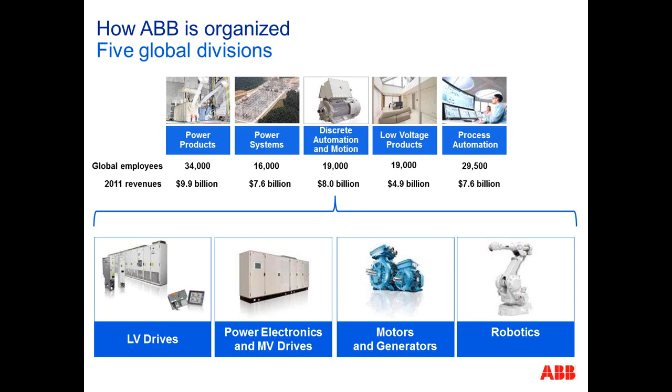ABB is divided into 5 global divisions, and robotics belongs to the Discrete Automation and Motion division. As far as the robotic paint business is going, we are located in many countries, as you can see on this map. We have operations in most areas with industries.

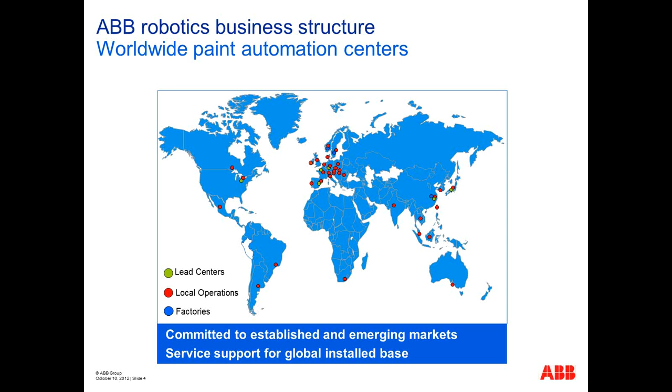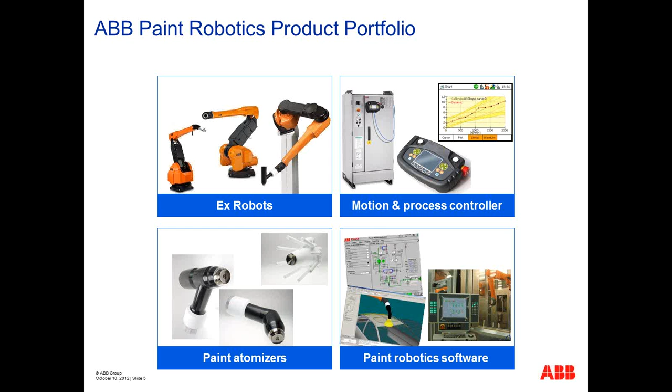ABB is producing a complete portfolio of paint-related products. We have explosion-proof robots, we have motion and process controllers, we have our own paint atomizers, and we have all the software that we need to control efficiently a paint system. We also have very efficient offline programming tools. We put all those products together to make a complete robotic paint system.

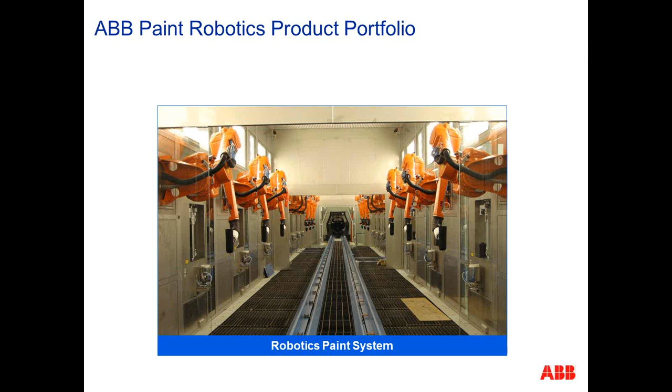So you see here on the screen an example of what it looks like when we put it together. What I'm going to talk about is our latest development in exterior car body painting, what we call the 3rd generation of robotics. And I'm going to clarify that.

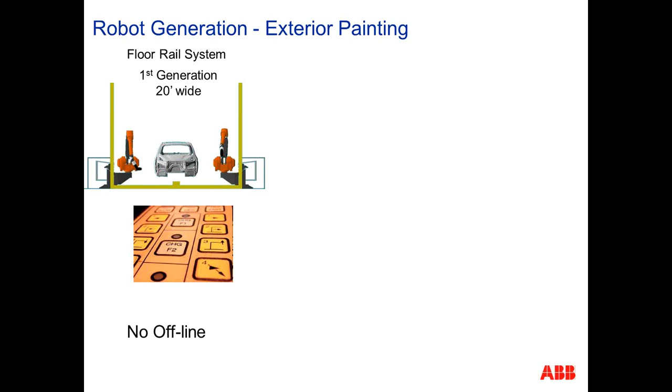The 1st generation, we had a robot mounted on rails, and they were kind of at floor level. With this, the spray booth was 20 feet wide, which is about 6 meters wide. We had programming done with a teach pendant with buttons that we were pushing. Not easy to program. Absolutely no offline programming tools.

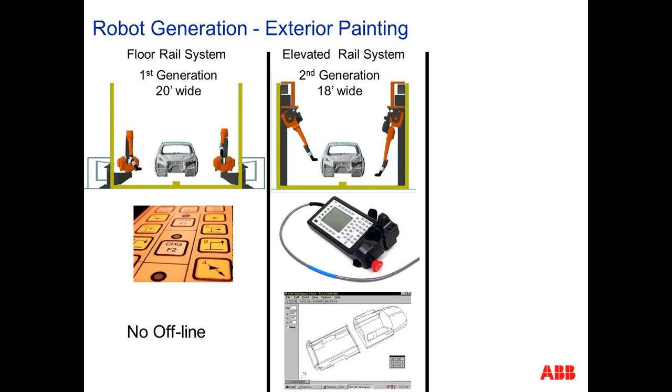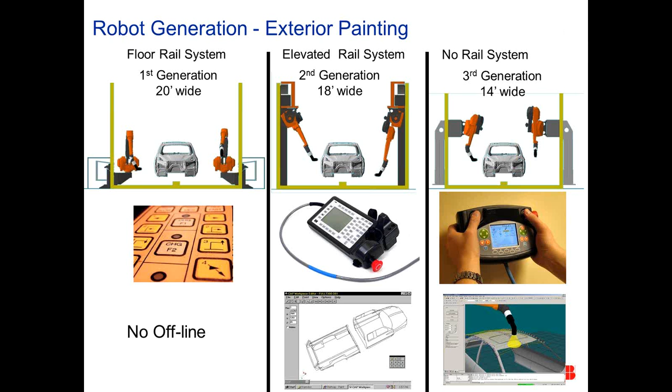The third generation is a little bit different. We have robots mounted on the wall of the spray booth. They are not moving with rails, they are stationary. We now have to program with a very sophisticated and nice teach pendant with bright color screens. Actually, it's almost like a video game station that you've got in your hands when you're programming that. And we have offline programming tools that are very powerful, letting us create all programs before we start programming anything with the robot itself.

So what's so special about this generation of robot, and how can a robot work in a narrower booth? So I'm going to play, it was supposed to be videos, but on a webinar that does not work very well. So I have little animations here that are going to explain how this robot has a unique kinematic that lets it work in a very small booth with bigger arms. So it's a little bit of a contradiction. We increased the size of the robot, bigger and longer arm, and now it's able to work in a very narrow booth.

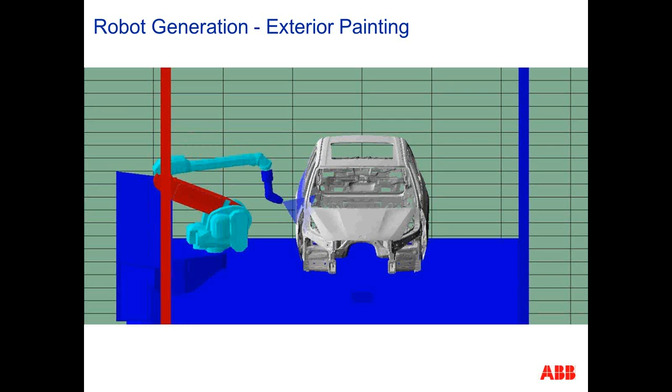In this animation you can see how the robot moves, and when it moves along the car, the back of the robot, this classic kinematic, is touching the back of the wall. So it doesn't matter where you put the robot, either on an elevated rail or mounted on a lower level, when it gets to that point, either you need a bigger spray booth, or you need the robot on a rail driving it up and down so you never have to go through this position.

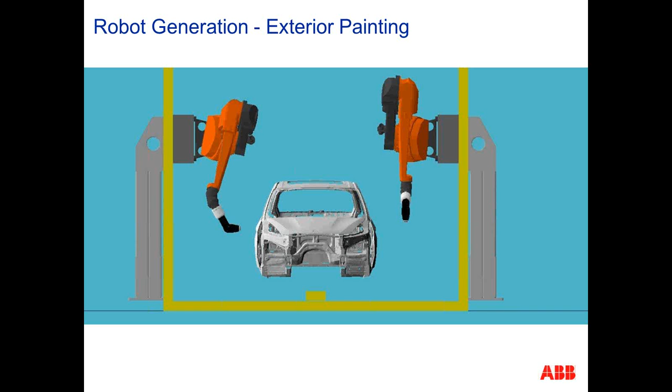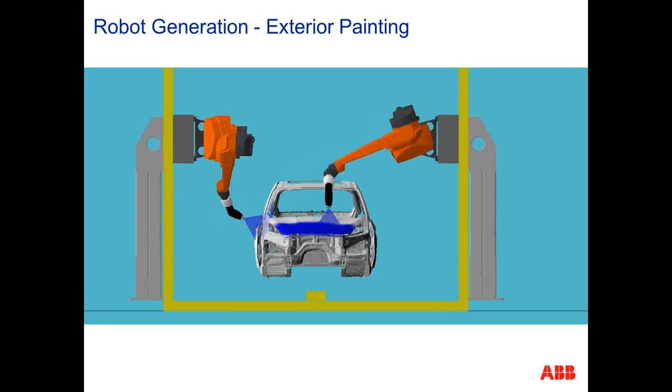Now let me show you how that works with the new kinematic of a robot. Robots are mounted in a different position and the kinematic is different. The robot on the left side is going to paint the side of a car, and the robot on the right side is going to paint a hood and roof, horizontal surfaces. The robot is working parallel to the booth wall, it never tries to go into the wall, it's just working like that. Same thing for the robot painting the hood, the elbow of the robot never tries to go through the spray booth filter. That's what makes the big difference for this robot, the kinematics: longer arm, working in a very small spray booth.

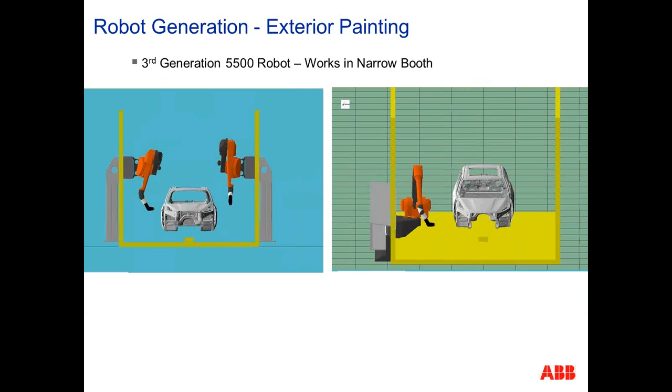If we look at this robot, it has many features, but we're going to focus on the interesting ones, those that impact your spray booth size and your production throughput. We're going to talk about high acceleration, large work envelope, and working without a 7th axis. What are those really doing when it comes down to designing a spray booth or a spray system?

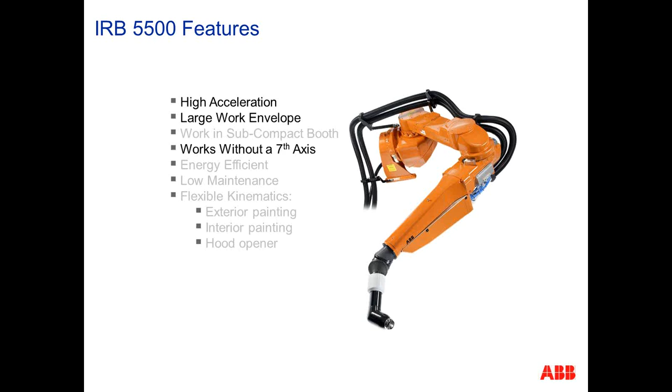The way we program the robots, there are 3 different ways to program robots at ABB. We have the classic programming method. On this screen you can see this little blue box surface, this is what I'm trying to paint. In this view you can see the robot motion. I have a little tracer that will show you where the robot has to move the atomizer, and the atomizer turns on and off every time it's changing direction. That's the classic way to program robots.

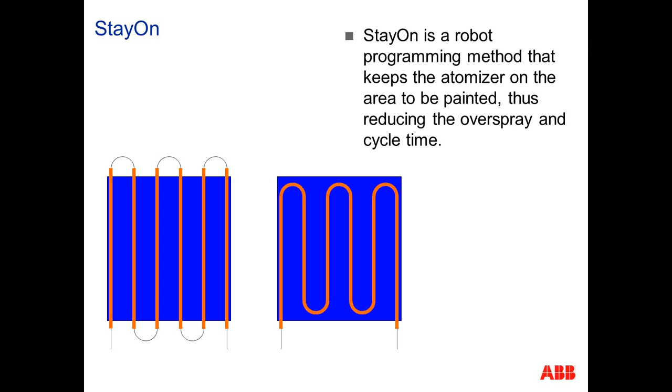We have developed another way where the robot stays on the part and the trigger stays on, so we call it stay-on. With this, it's quick to understand that you get a shorter cycle time because you travel less distance. You're reducing the overspray and you're reducing the paint consumption.

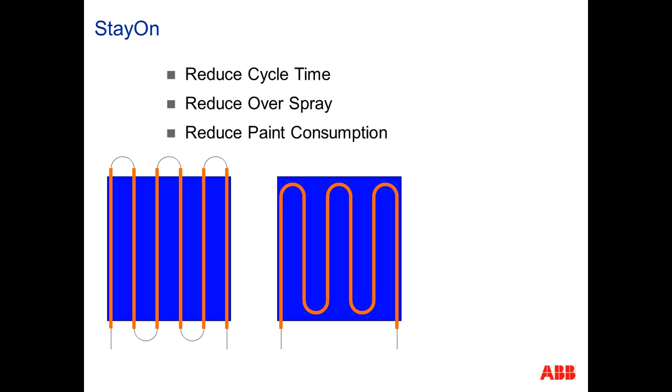I had this question many times, everybody's asking me, well, why didn't we do that before? What's so new? Why don't we just do that all the time? The answer is very simple.

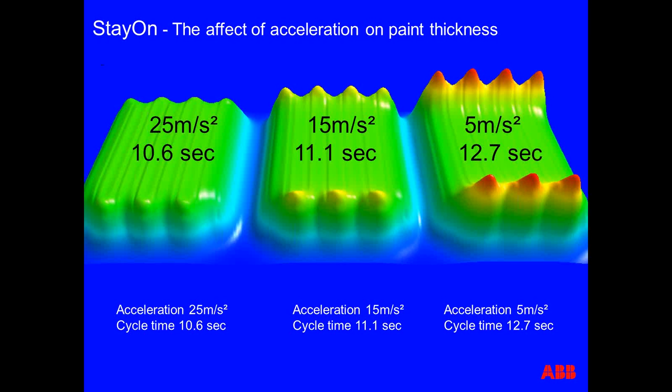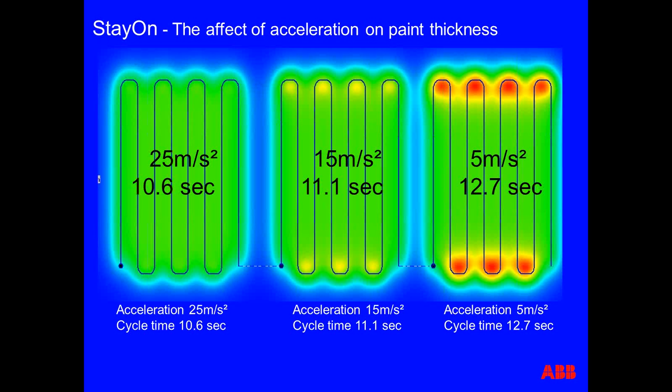The second impact of high acceleration is the cycle time. If you look at this slide, it's very easy to understand that to achieve the exact same distance, if you have acceleration available, you're going to travel faster. So we can see here on a simple program that could be a hood or half a roof on a car, already 2 seconds of cycle time difference, just from the acceleration.

Do we need a 7th axis on a robot like that? Let me show you a little cross-section here, and you're going to understand where I'm getting with this.

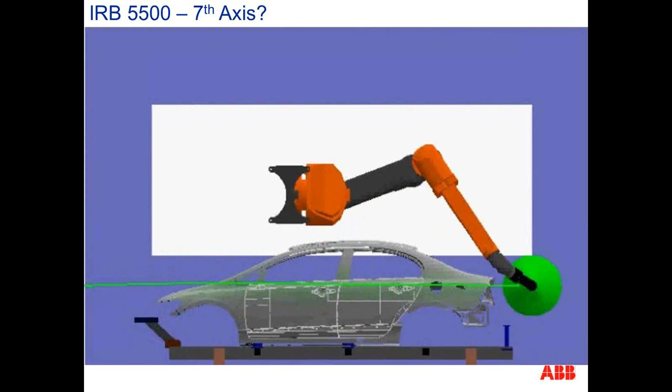This robot is not moving. I put a car here that's around 4 meters in length, just to give you an idea of the scale of what this robot is able to do.

So this robot, from a stationary position, is able to paint on the side of a car strokes of 6 meters long. We don't have that many cars that are 6 meters long right now, but when the car's moving, that's enough to let us paint the side of the car.

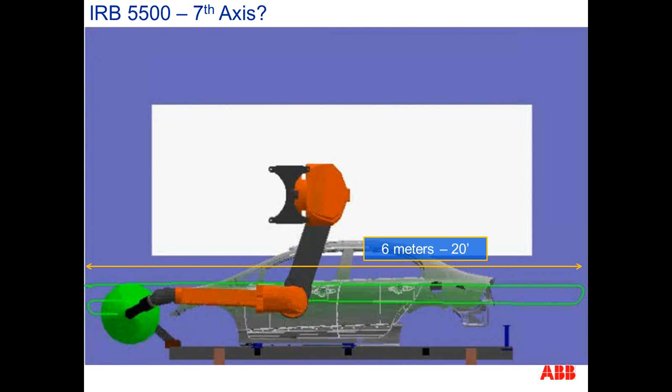This is what really makes a big difference in the way we program. I'm going to explain how we use this large work envelope to improve cycle time and paint quality.

Let's say I have to paint the hood of this car here, and a classic way to spray it is you split it among the left and the right robot. So right now I can see a robot on the left side of the car spraying half the hood, and I have a robot on the right side spraying the other half. Now what I have to do with those two programs, left and right, I have to do some stitching to join them in the middle.

Usually this area is where we have trouble with quality. Either we have too much paint, not enough paint, not distributed correctly. And it's visible right on the front of the hood.

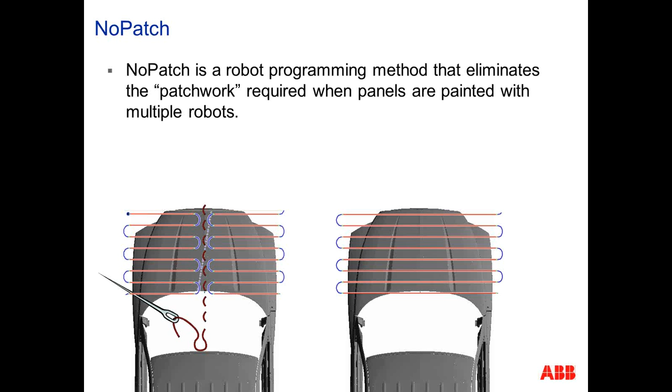Another way to do it would be to just paint completely left to right, like that. Complete the entire panel, no interruption in the middle, no junction, no stitching. To do this, you understand you need a large work envelope.

So not only do you get a better quality, but here also, here's the impact on cycle time. If you do 2 programs versus 1 program, using the exact same application parameters, same speed, same acceleration, there's a 4 second cycle time difference just on 1 panel on the car. So you understand here the impact on the cycle time.

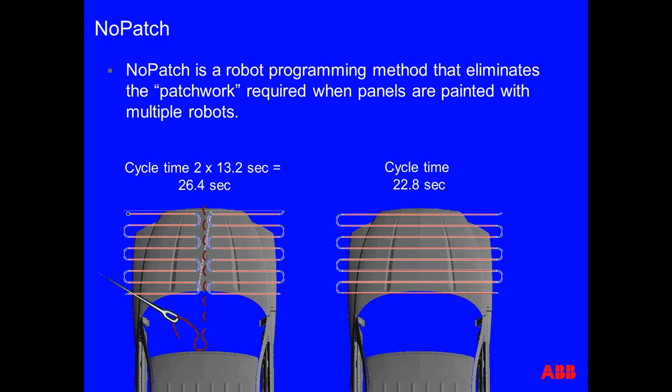Now let's talk about quality on the car. As you are making the stitching on this panel here, you're going to have little bumps and little valleys. On this model, this is kind of the best you can get, really close to the best you can get. So you can see that not stitching the programs, or not patching with multiple little programs, makes a more smooth and evenly distributed layer of paint.

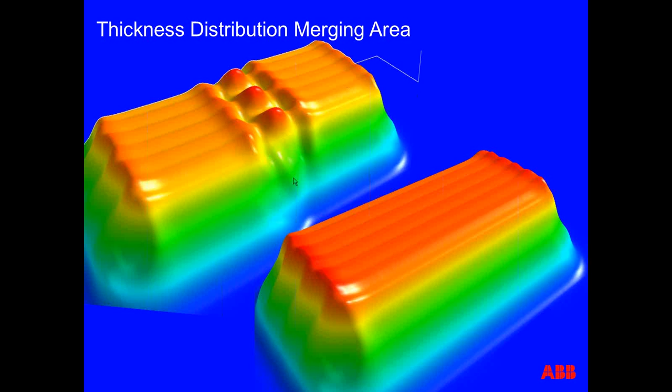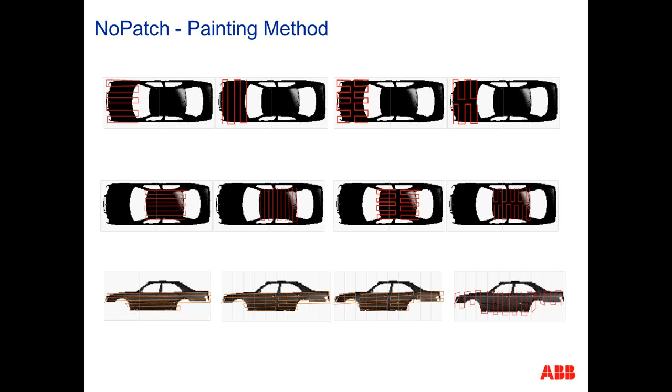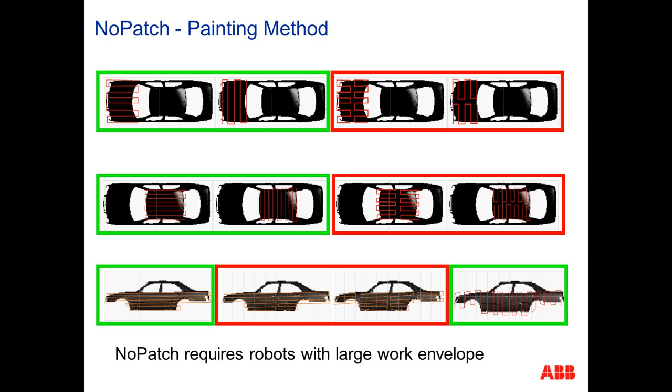So here's a little recap slide where you can see the many ways we can program a car with robots. There's many good ways and many ways that are not that good. Here's a highlight, in green, of what we want to do to improve cycle time and have good quality. Only a large work envelope robot will let you do that.

This is how it looks on the car when it's programmed. This is the path that you will see covering the entire side of the car, front to back, covering the entire hood front to back, and same thing with the hood, left to right, with paths that are a little bit curved to follow the hood.

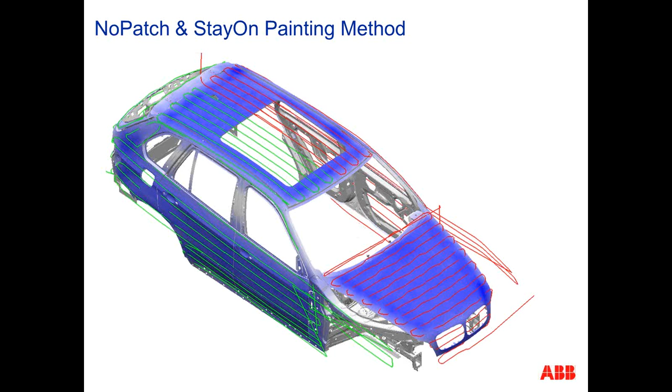So we talked about the classic. I just covered in very details the stay-on. There is another development that we have done to reduce cycle time and footprint, which is what we call variable pattern.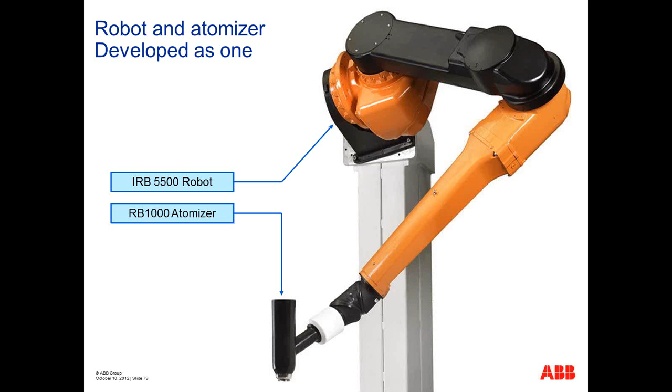Before I talk about variable pattern, I'm going to introduce you to something as important, or more important, than the robot: the atomizer, what we use to spray the paint. The robot has a large work envelope, high acceleration. This atomizer that we developed, called the RB1000, has a very high flow rate and a very powerful turbine. It's very powerful overall.

So this little slide explains what we were looking at, where we were designing. We wanted to expand the operating window of the atomizer. You can have a very good robot, but if you don't have an atomizer that sprays the paint well, the robot will not do much.

So if you look at this slide, you can see where I would say current products are on the market. When you're reaching 500 cc flow rate, you're starting to really stretch what you can do, and your operating window is narrowing. And we are now able to spray in the 1000 cc area.

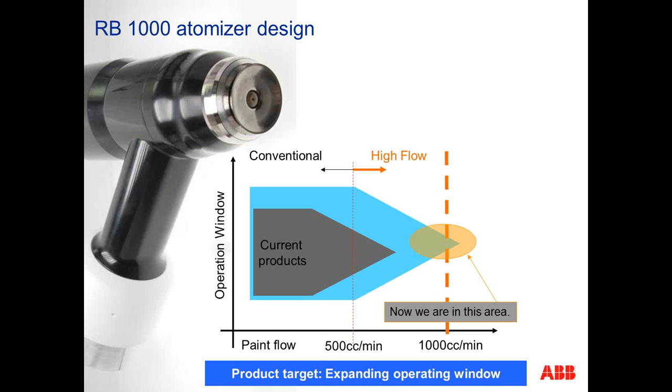As you can see on this illustration, the window is a little bit narrower, but still we were not able to go there before. So now what it means is we're really comfortable spraying flow rates of 700, 800 cc's, and we already have a few systems working really close to 1000 cc.

What's important to do that is to have a very, very powerful turbine and air motor. So this is a rotary atomizer. The little bell cup that you're seeing on the screen here, if I may, find that here. Second, my screen disappeared on me.

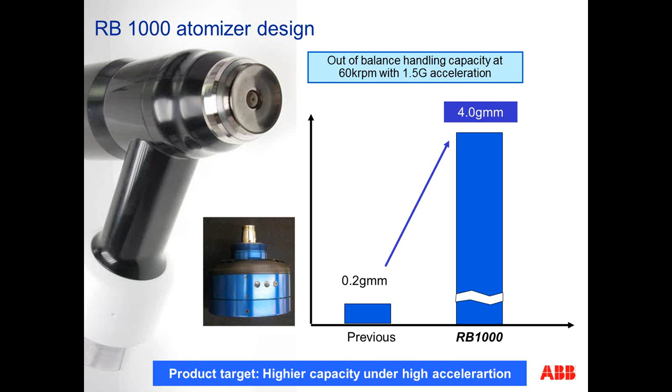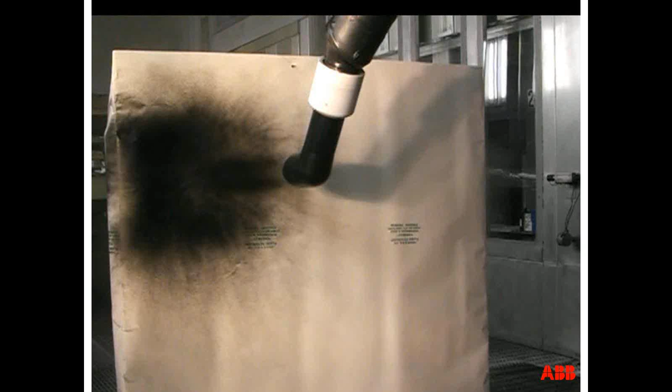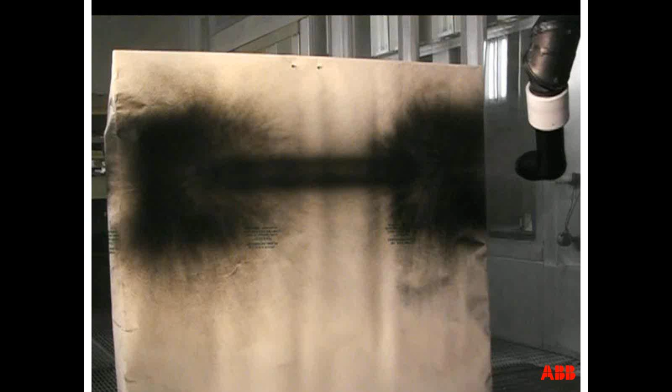Another key feature of this robot is the ability to control the pattern size. In this animation, you can see this atomizer spraying a very large pattern, then switching to a very narrow pattern in the center, and now going back to a very large pattern. With this ability to go narrow and wide, we're going to improve the way we put paint on a car. We can put paint on much faster and use less paint.

So let's talk about the programming for variable pattern. You understand this atomizer is able to spray a large and a small pattern. So what we are going to do is use both patterns.

A very narrow pattern, here represented on the screen as the red line, because when I'm on the edge of my panel I will not have a lot of overspray. Then when I'm in the center of a panel, represented by the yellow line, I will use a large pattern, which is a lot more efficient.

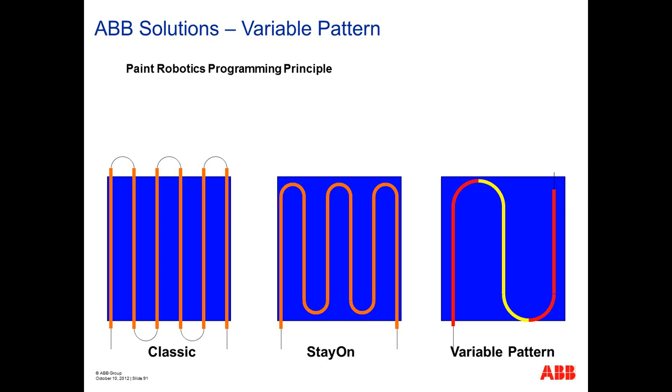I can put out a lot of paint in a very efficient way. So this is how it looks on a car body.

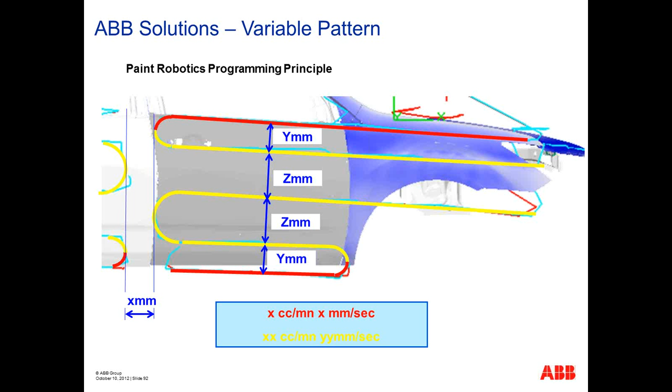This is an actual program that I have edited for the presentation. You can see on the bottom of the car the red path going with a lower flow rate and a smaller pattern. Then we go to the yellow path. We will have three passes with the yellow parameters, going a little bit slower and with a very large pattern. Then when we get to the top of the car, we get back to the smaller pattern. With this we're able to cover the entire side of the car in a very efficient and fast way to program.

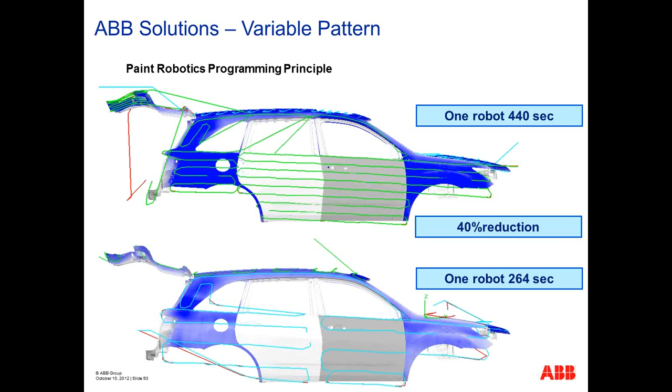Now if I use this new programming method, the variable pattern, I'm able to spray that car in 264 seconds. On a car line running at about 38 to 45 jobs per hour, the 440 seconds means I need 5 robots to do it. The 264 seconds means I can do it with 3 robots. It's a big difference.

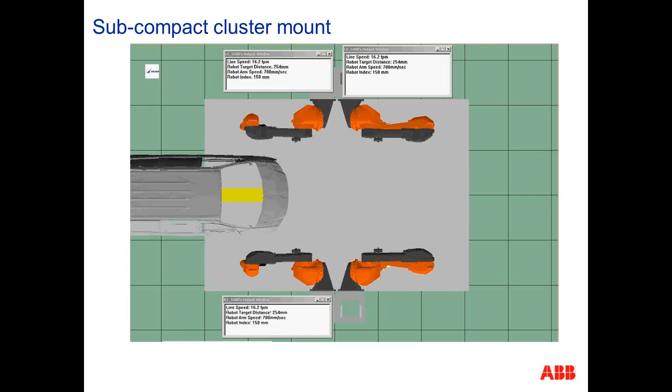So with this robot, you understand that we are able to design what I would call a subcompact spray booth. We can mount the robot in a position like you see on the screen here. We call that a cluster mount. In a very narrow spray booth, you can see here the tracers of where the robots have worked. We can spray an entire car here in a very narrow, short booth.

So it's a big difference when we're migrating from rail robots that take more length and more width than this robot.

So again, I'm going to try to quantify that for everybody here on what is the impact of this robot on the design of a paint line. If you look at this basic design here, it's a classic concept where robots are mounted on the rail, and we have multiple zones for exterior and interior painting.

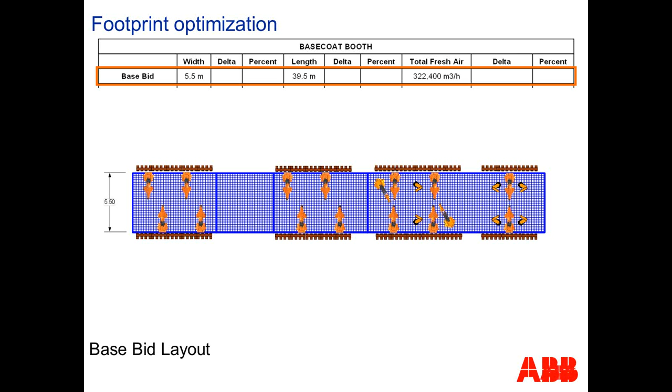So when we use the 5500 robot, the first thing we can do is reduce the width of the booth, going from 5.5 to 4.5 meters. And that's giving us already 15% of reduction.

Then after that, what we can do is reduce the length because we don't have a rail. Robots, when they work on the rail, have to manage their position related to each other. So you always need a little space between the two robots so they don't run into each other. When the robots are not mounted on the rail, you can put them really close to each other.

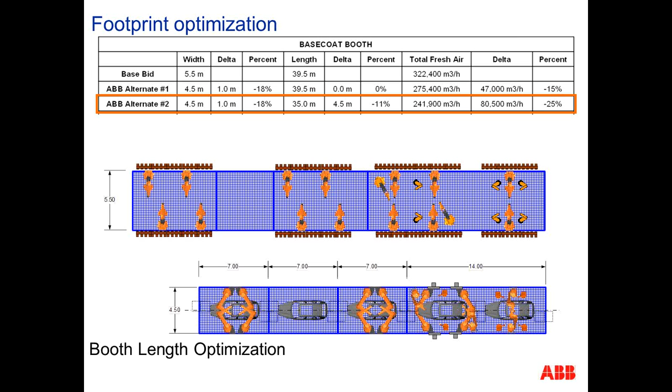Everybody knows where everybody is. Very easy to program. They can work in a very confined space, close, 4 robots in the same area. Absolutely not a problem. You don't have to manage it. You know exactly where the robot is at every time. Programming is easier. So with this, we're able to reduce the booth length, and here that's a 25% saving in the footprint.

The next thing we can do is, because the robots are more compact and do not need a rail, on the interior painting I don't need 2 zones. Right now I have 2 zones because it's very difficult to put 6 robots in one small zone, since when you have 3 robots on one rail, that drives the length. And since it drives the length, might as well have 2 zones. So here you can do everything in one zone, and that's reducing the footprint down to 37%.

And another option that you have is compared to this one here. In this one, you can see, let's start on the right of the screen: the first zone at the bottom here is the interior painting zone. Then the second zone is the first pass exterior. Then you have an empty zone for flash off. It's time that we need between the 2 layers of paint, and then we have the second layer of paint with the last zone.

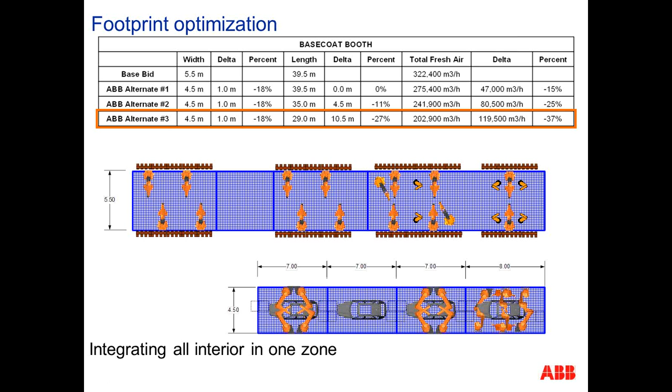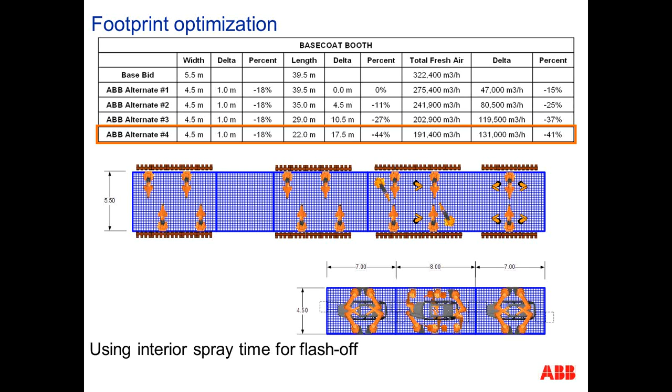So what we can do here in the layout is use the interior painting zone as the flash off zone. So this empty zone with no robots just disappears, and that further reduces the footprint to 41%.

So if you look at this slide here, you can see the complete steps all the way down to the footprint. And by the way, this is to scale, so that gives you an idea of the footprint impact when you use this type of robot and this type of atomizer. This is a lot of savings.

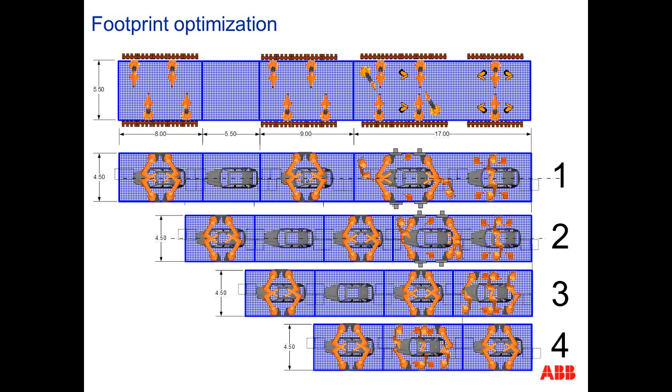Another thing I want to point out is there's so much flexibility in this robot and the way you can use it. When we are studying projects, here's an example of a study we've done, there are so many options we can look at, and that makes the design for optimization and creating the perfect layout a lot easier when we're designing the lines.

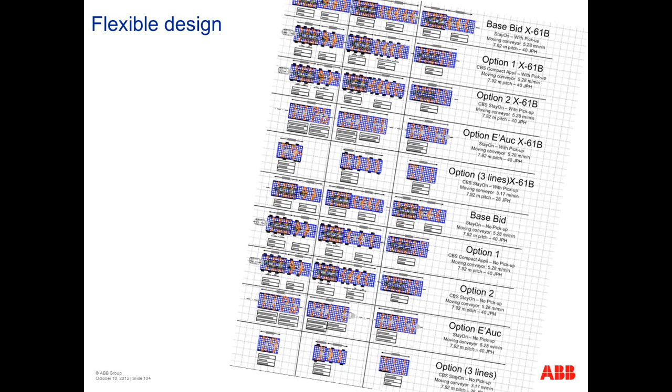So here I'm going to recap a little bit with the slides.

When we design a complete system, what is the impact and synergy between all the products, processes, and concepts we use? When you use one type of robot, because we only use one type, the same robot does primer, base coat, clear coat, interior, exterior, opening doors, closing doors, hood - same machine for everything. It makes everything easier, where a lot of robotic systems use 2, 3, sometimes 4 different types of manipulators.

It's exactly the same for the Atomizer. The Atomizer we use is the same for base coat, primer, clear coat, waterborne, solvent-borne. We use it for interior and exterior car painting - the same Atomizer for all applications. So there's a big reduction in training, parts, and maintenance. It makes things more simple.

We do not use a 7th axis. We have paint lines running up to 80 cars per hour, conveyors moving 10 meters or 30 feet a minute - very fast lines without a 7th axis. So it's not related to your conveyor speed, it's just the way you use the robots.

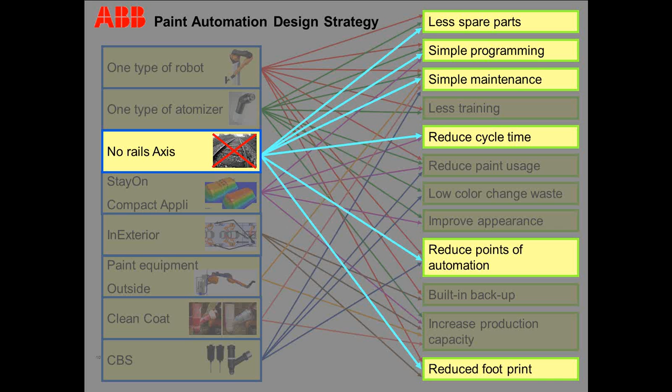Because we're not using a rail and the robot is efficient, you're able to reduce the number of automation points for a smaller footprint. The stay-on variable pattern really reduces the cycle time, reduces your paint usage, and there's a slight increase in production capacity.

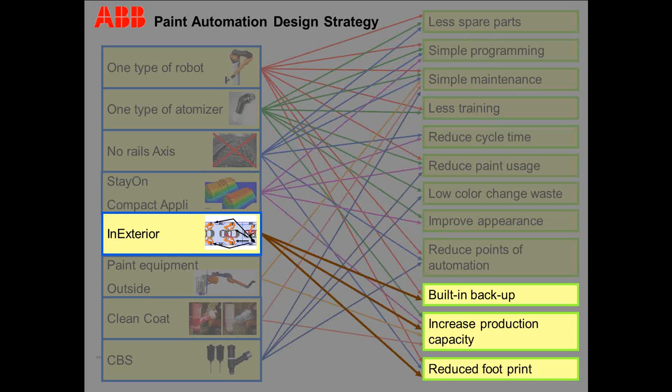InExterior, this is a concept we have not reviewed - that will be for our next webinar - but it really reduces your footprint further, with paint equipment sitting outside the spray booth. For most applications we use Cartridge Bell Systems, meaning on the arm of the robot there's no paint line and no controls. Everything is done outside the spray booth, so the robot comes back and gets a cartridge to work in the spray booth, and there's absolutely no equipment mounted on the robot.

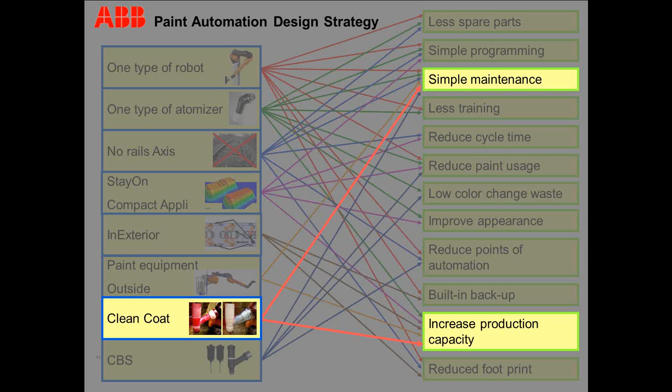The clean coat concept is something we have not reviewed in this presentation, but it's equipment we install on the Atomizer that reduces or eliminates contamination. It increases the time between manual cleanings.

A Cartridge Bell system, as you see in this small illustration, is the most simple waterborne system on the market. What you see in the picture is pretty much what you need to work - 2 cartridges and an atomizer. There's nothing else, very simple. It's more simple than a system with a classic color change and a gear pump.

There's a great reduction of paint usage here because the paint is never in paint lines - the cartridges dispense paint directly into the bell cup. There's almost no waste on color change, and no paint line to clean. That greatly improves transfer efficiency, having internal charge on waterborne, which further reduces the requirement for more robots due to less efficiency.

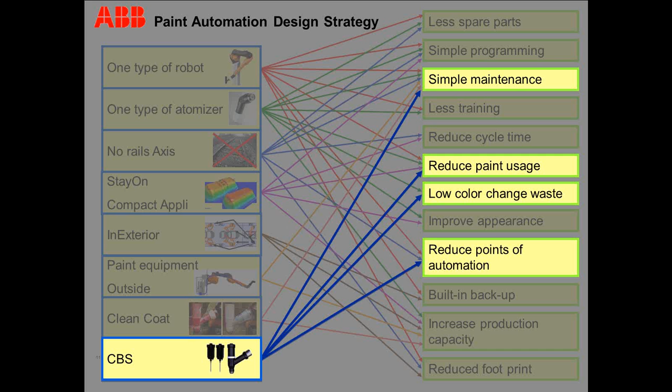If you combine all those features together, that creates a lot of synergy, and this is where it becomes very powerful, compounding a lot of benefits when it comes to cycle time reduction or footprint reduction. We can really quantify that - if we were not using this type of robot and atomizer, along with the advanced programming methods we have, a lot of the installations we're putting out would require more space, more robots, and would not be as efficient.

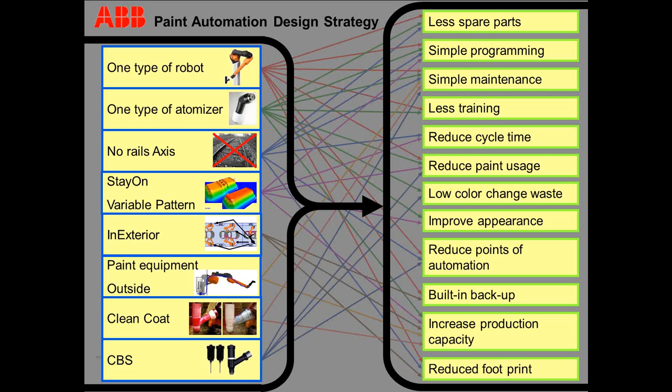This concludes my presentation, and I'm just going to hand it over to Simon for questions and answers.